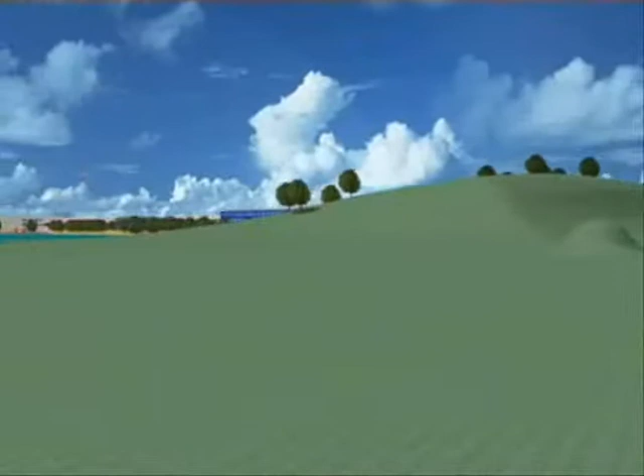The project we have in mind is a dream, like the story of Atlantis. What we are proposing is a new project able to connect the historic culture of the most developed civilization of the past with new technology to live under the water.

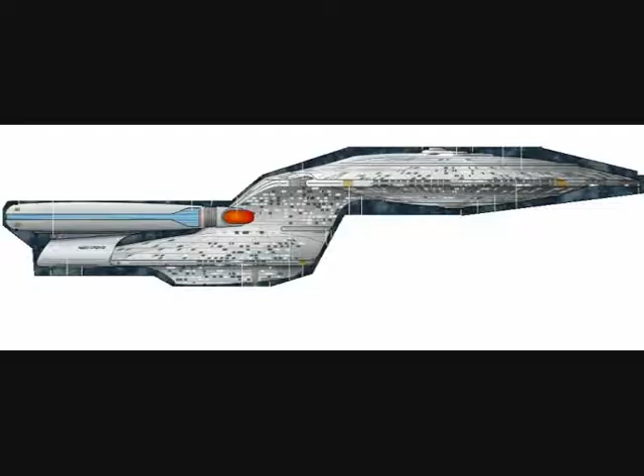Our project recalls the Star Trek design of a mothership named Enterprise. This is the reason our project is named Atlantide Enterprise. Past and present for two countries, Egypt and Italy, which could have the same origin as Atlantis.

This project is the synthesis of research and its following applications in order to obtain a new form to build a hotel in the water with a new idea able to respect the ecological system and environmental impact. Our construction has the same impact as a boat floating in the water, and the only contact with the deep sea is the anchorage.

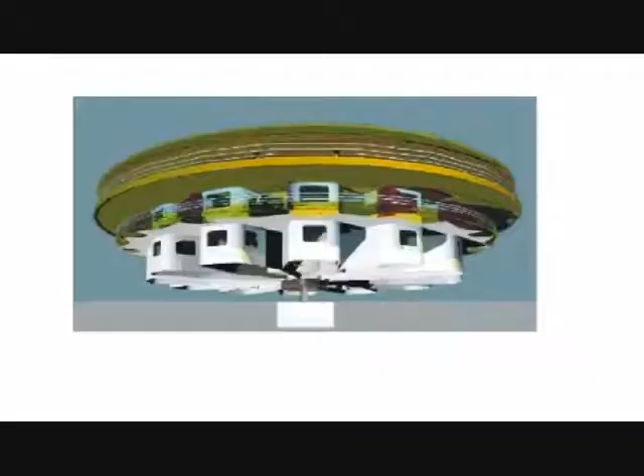Our goal is to realize a super modern hotel half under the water, with submerged sleeping rooms equipped with a big window for a submarine view. The high tech we obtain from our supplier allows our structure to rotate on itself, realizing a continuous changeable view all over the 360 degrees of the sea around.

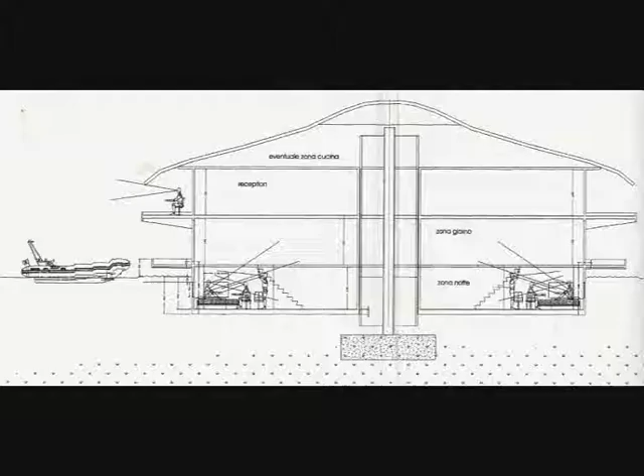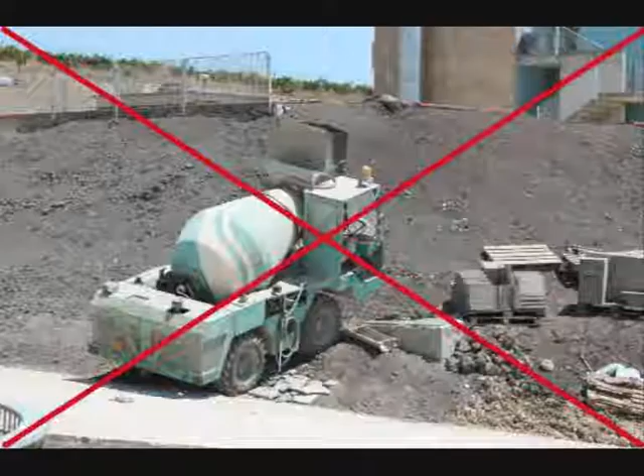What we really want to innovate with our idea is the opposite concept normally used for building recovery for tourists, people, or inhabitants all over the world. Normally cement and material are used, destined to remain forever or for centuries in the place where it is built, developing and transforming the habitat forever where the construction takes place.

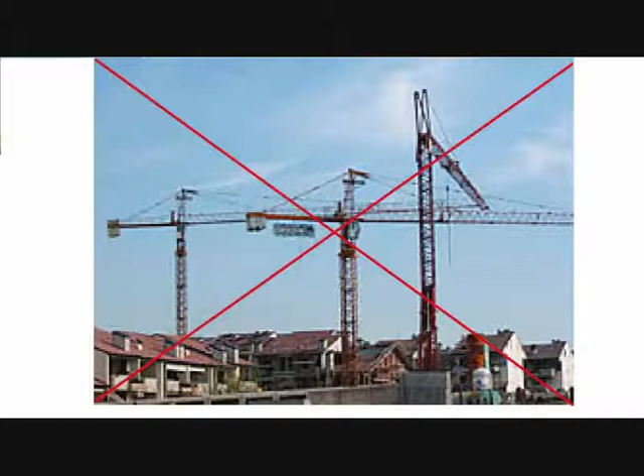The consequences are a deep change of the nature of the environment around, and it will never be as it was before. Our purpose is to supply and utilize something that in any moment we can move to another place, or disassemble in a few days and with a relatively low cost.

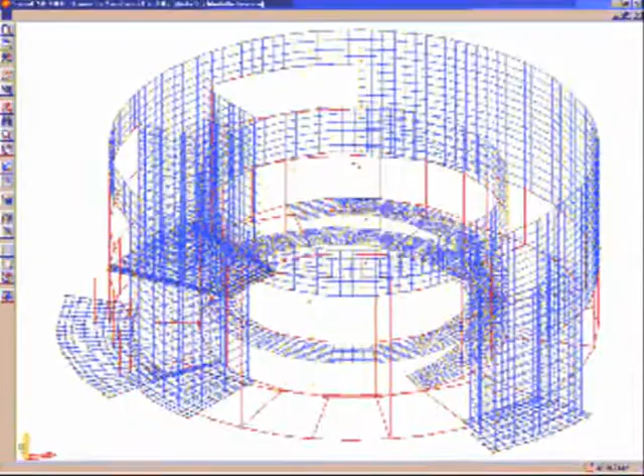Even the impact of the building yard during cement construction has a brutal impact on the ground and on the environment. With our project we want to respect the area, the habitat, the nature of the place from the beginning.

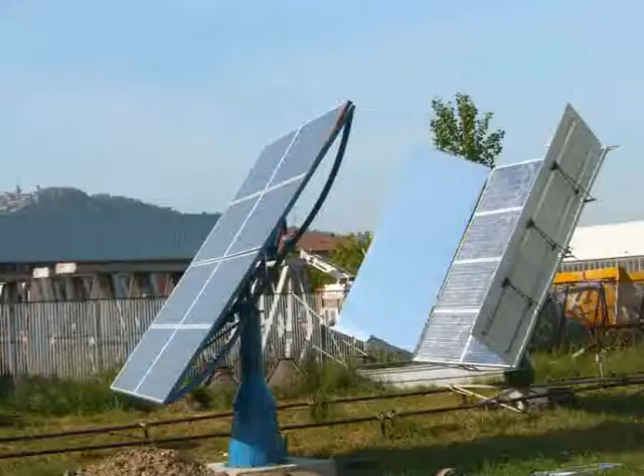Traditional structures always use petrol to produce the necessary electricity. In our structure, instead, we obtain electricity and hot water from solar panels. If more electricity is needed, or in an emergency, we add a container as a complete unit for cogeneration energy.

Our philosophy: nature is the protagonist, and we want to exalt this treasure in a way that all the tourists can be delighted by this show. Moreover, we put a lot of attention into being able to leave this value to our sons.

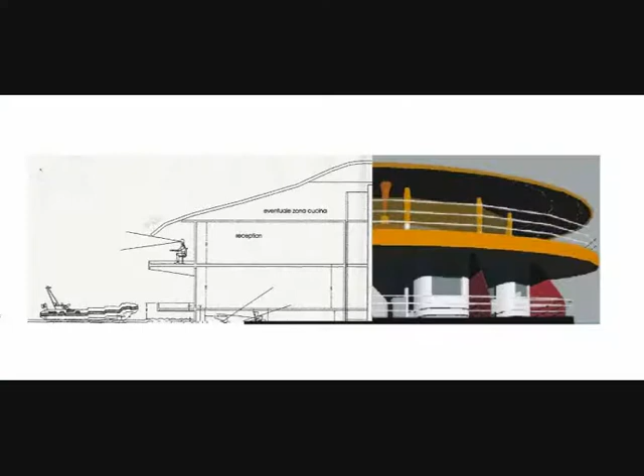Our mission is to realize a tourist company consisting of a floating water hotel with a very original new guest structure, the second of its kind in the whole world, full of new technology that we can summarize in the following points: the energy aspect, sun, wind, hot and cool insulation, environmental impact, and careful space and geometry utilization.

Quality of material and correct location, autonomy and self-support for the work, production of sweet water with a desalter, garbage storage and transfer, and remote control by computer for all maintenance assistance.

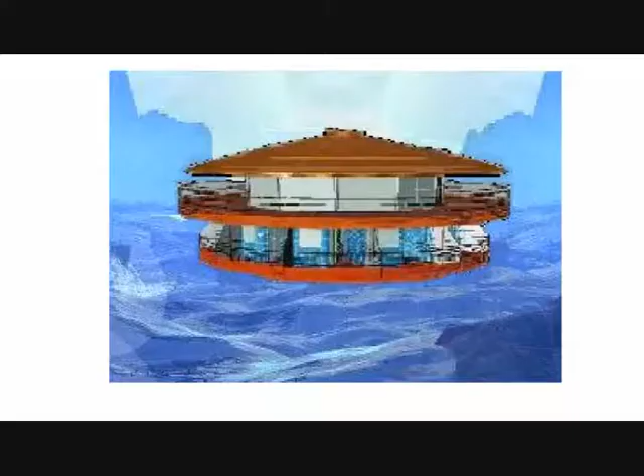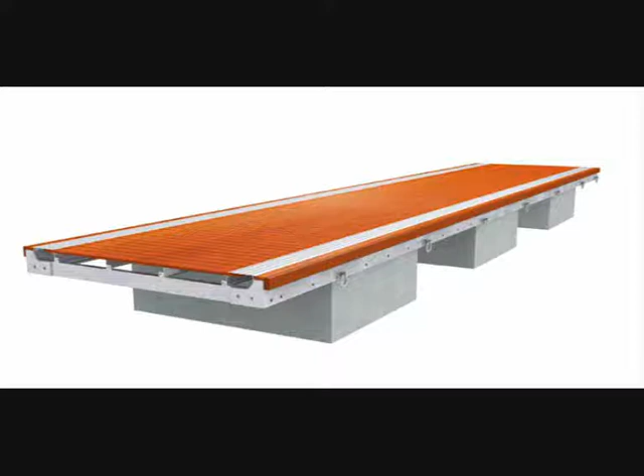As we said before, the complete hotel floats on the upper level of the water like a boat house, and the half part is under the water level like the hull of a ship. The whole structure will be placed in the high water some meters from the shore, and guests will reach the hotel by a floating pier or by boat.

The whole project is designed with particular attention to having the least natural impact, thanks to the following features. First of all, the position of our structure is partially under the water level, so the visual impact is partially reduced and it appears as a boat floating on the water.

The relation between the dimension and the space has particularly been taken into consideration during the project studies, and each module perfectly resumes the fruitful utilization of volume and area.

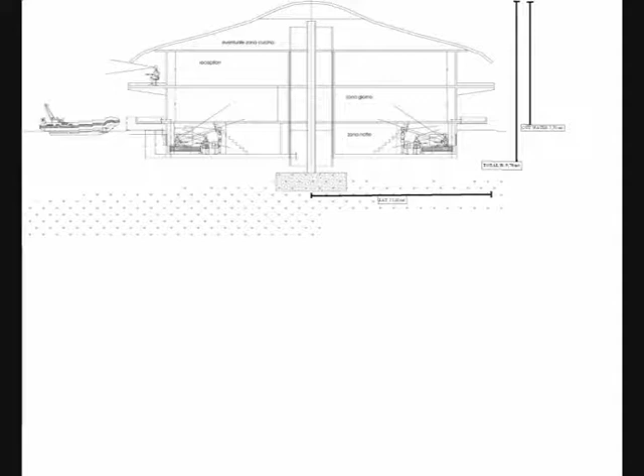The building and all the structures are completely assemblable and dismantleable like a toy, and we can move it at any moment from the area where it is placed and return the site to how it was before, leaving everything as if nothing was ever there.

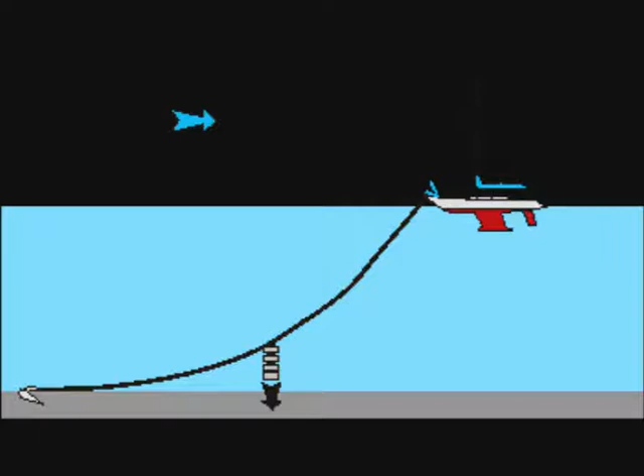The anchorage: another very important point in our project is the system used to fix the structure into the sea. Faithful to our concept Impact Zero, the anchorage also has to be removable at any moment without any permanent consequence on the sea habitat.

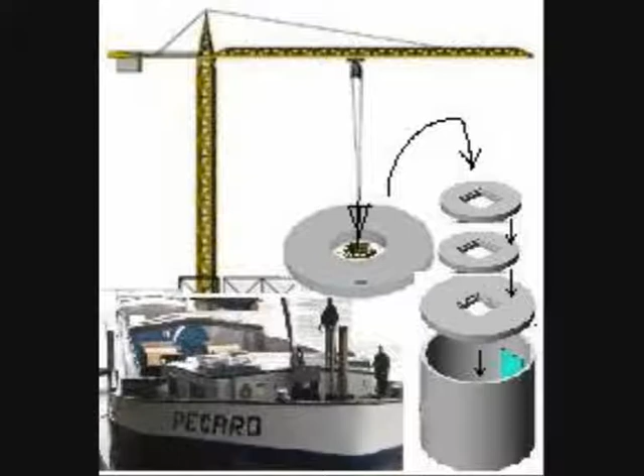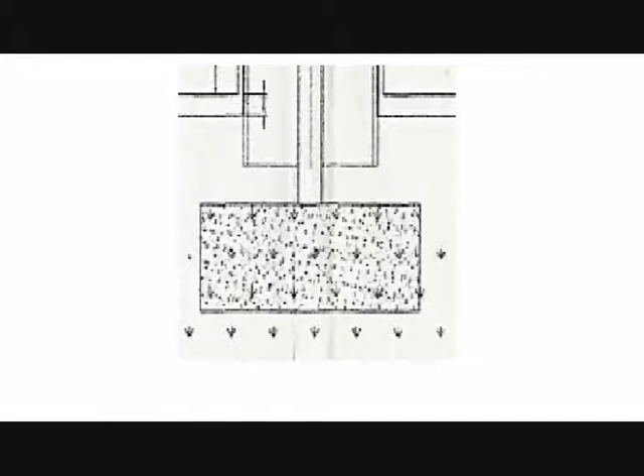The plinth is made of a cement component manufactured in a factory and assembled in the sea in a way that no liquid cement is poured into the water. This way the plinth can be located on the sand, avoiding damage to the sea floor.

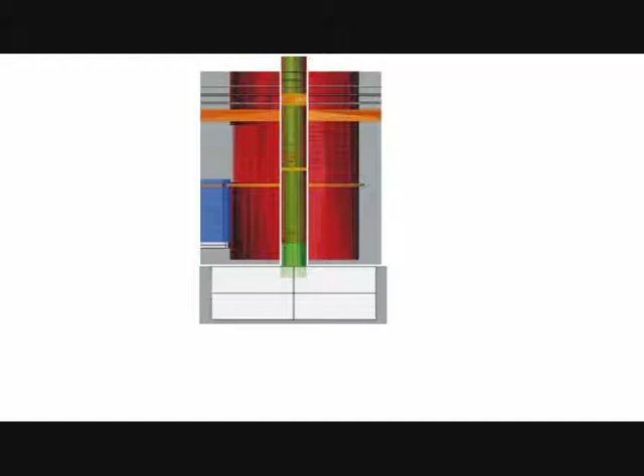The system is very simple and tested through our experience with many equipments. The center pivot is connected with the big plinth, and all the structure can slide on it in a way that allows it to amortize the waves. The whole system is very safe and very easy to maintain.

The structure slides on the big pipe and lands on the sea like a spaceship.

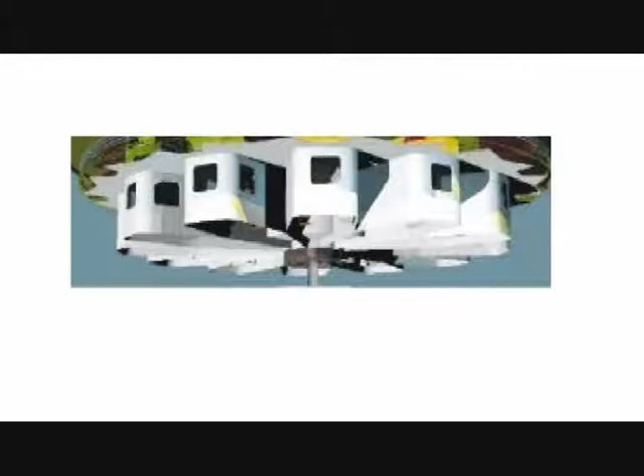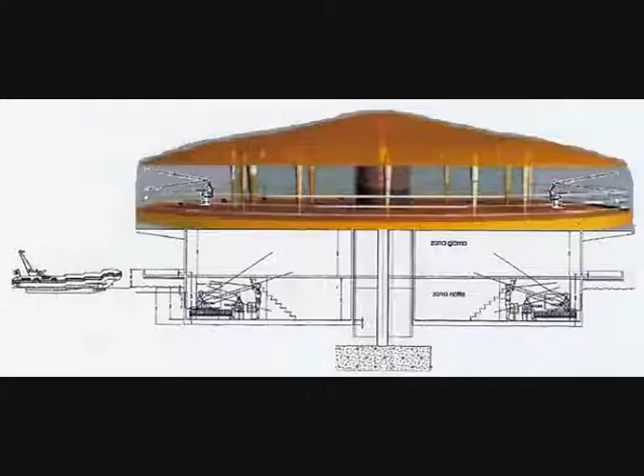The modules consist of 12 triangular-shaped rooms with round ends, like daisy petals. The modules are individually manufactured and then assembled to form a round flower-like structure spread over 3 levels.

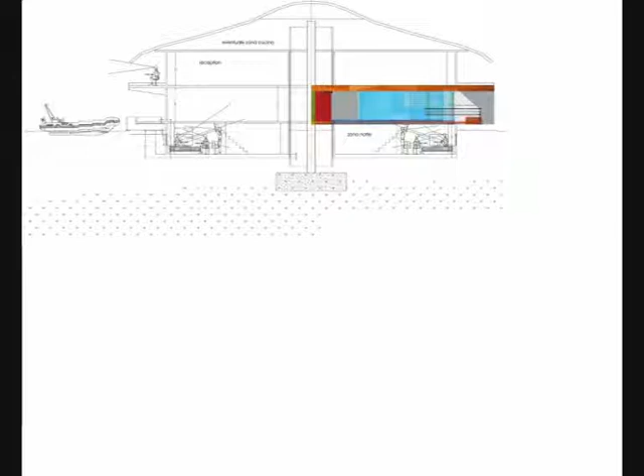The underwater level for bedrooms, the water level for the living room area, and the upper level for the flybridge, reception and restaurant area.

In the low level under the water we have the night zone, with 2 big windows facing the sea and 1 big mirror on the third wall.

The immersed level consists of a bedroom with a bathroom. The wide windows allow a panoramic view of the sea bottom, which the slow rotation keeps always new.

The water-level floor opens onto a private terrace, where guests can sunbathe, relax and swim, like from a boat deck. A special wall provides enough privacy.

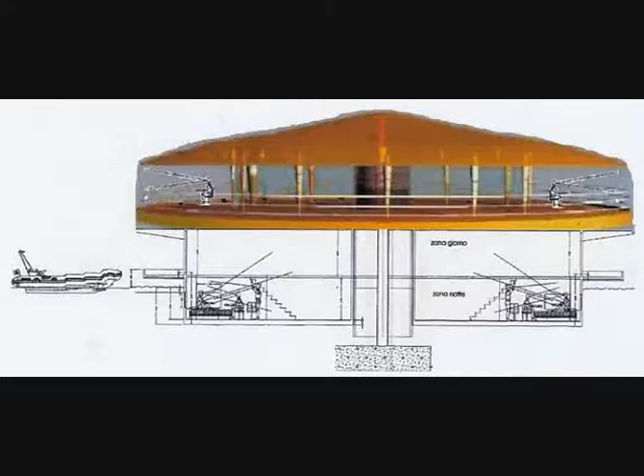The superstructure features a dome that covers the entire structure. It houses the facilities and covers the reception area, the hall and the dining room.

In this part we will organize the reception and the restaurant. As mentioned, the reception is foreseen on this floor, and the balcony all around allows a very nice and romantic view. The restaurant will be at the same place.

We want to organize it as a mix between an Egyptian fish market layout and the Italian recipe, for an Italian flavor of food.

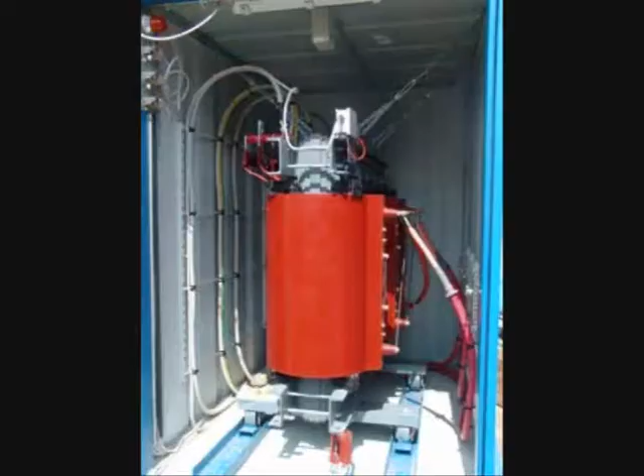The hotel is completed with many equipment located on the shore and connected by pipe to the activity floating on the water.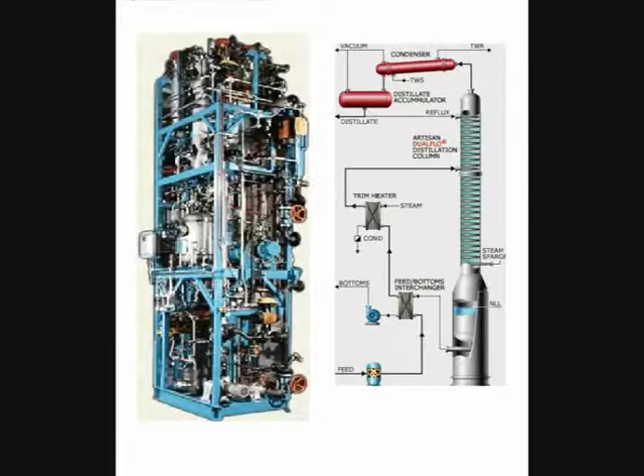The salt plant produces sweet water from sea water using osmosis technology or steam distillation, with sewage recovery by autoclave and water depurator, transforming black water into clean water.

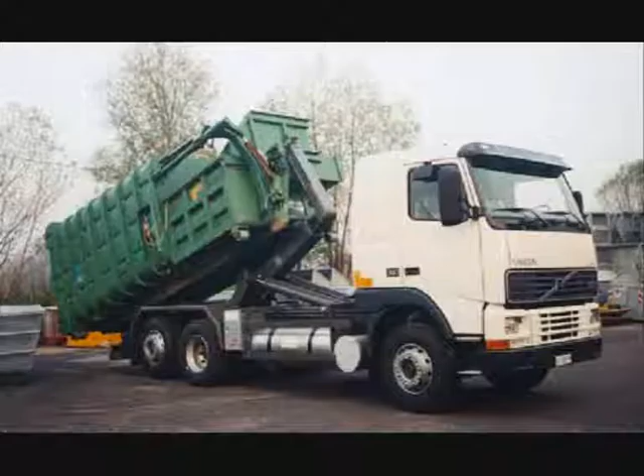The sub-hotel may be located close to a coral reef or where the sea offers interesting sea-bottom life, in sheltered water, or with protection supplied by specially designed artificial submarine barriers, which also aid the restocking of sea life.

This is a dream that could become a reality. Let us have a place for building the project. Thank you for your attention.